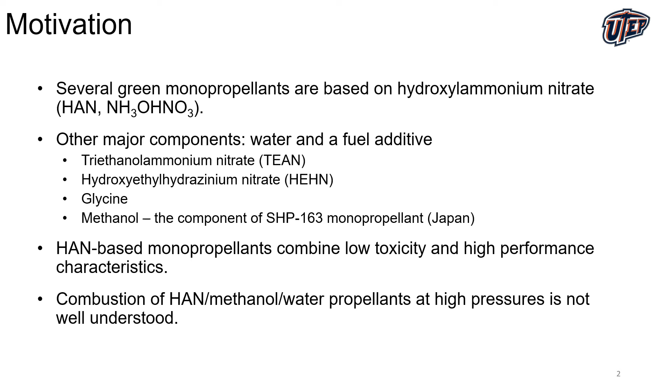It's also interesting to note that the formulation that had less water only had 2 pressure regimes, both with a positive pressure exponent. However, the burning rates were lower over the tested pressure range, suggesting that water may play a role in the combustion of these propellants.

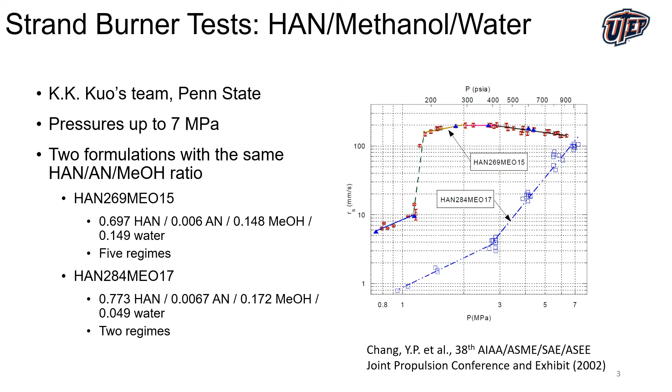Some additional tests were conducted by Petersen's team at Texas A&M. They tested at pressures up to 22 megapascals using both 82.4 weight percent aqueous HAN solution and a solution of 70.1 weight percent HAN, 14.9 weight percent methanol, and 15 weight percent water.

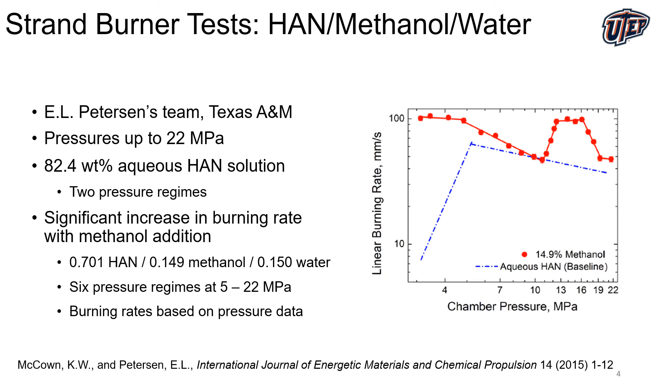For the 82 weight percent aqueous solution, shown in the blue line here, they found 2 pressure regimes, including a rapid increase in the burning rate at low pressures, followed by a negative pressure exponent beyond about 5 megapascals. With the addition of the methanol, they found a great increase in the burning rate at lower pressures, followed by 6 distinct pressure regimes as the pressure increased up to the maximum tested of 22 megapascals.

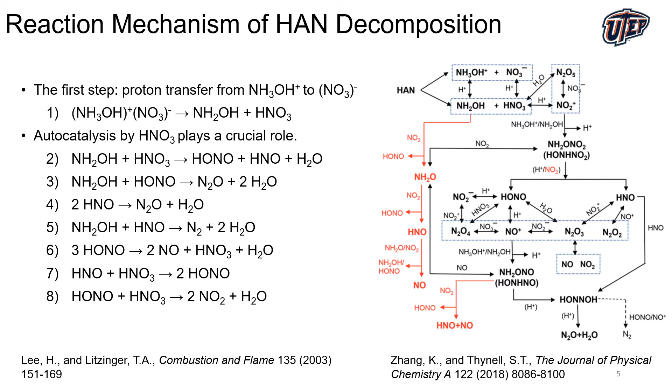Briefly discussing the reaction mechanism of HAN decomposition. On the right, we can see a more complicated analysis of the decomposition mechanisms. However, we focus on the left for a second. The generally agreed upon overall reaction mechanism starts with a proton transfer, creating hydroxylamine and nitric acid, and then from there the nitric acid plays an autocatalysis role throughout most of the rest of the decomposition. This indicates that the nitric acid plays a significant role in the decomposition process, which we'll get more into later.

Combined with simultaneous mass spectrometry, during these tests we identified the major gas products as water, nitrogen gas, nitric oxide, nitrogen dioxide, nitrous oxide, and nitric acid.

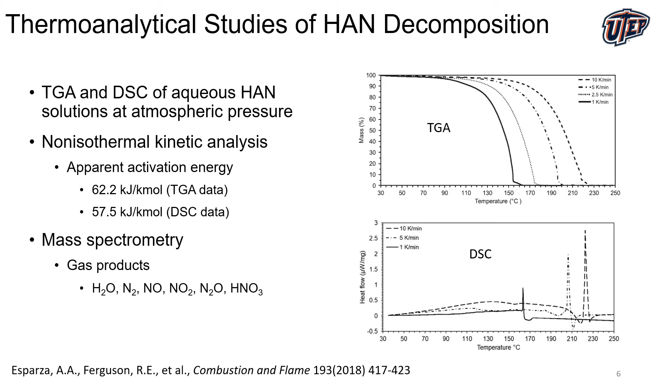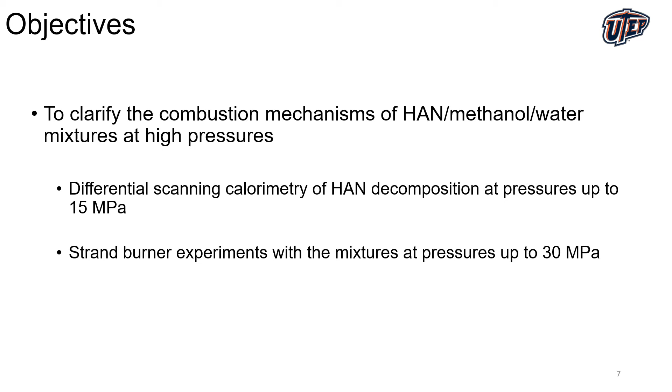So the objectives of the current study are to clarify the combustion mechanisms of HAN methanol water mixtures at high pressures, and we intend to do this by using differential scanning calorimetry of aqueous HAN solutions at pressures up to 15 megapascals, combined with strand burner experiments with the mixtures including methanol at pressures up to 30 megapascals.

For the propellant blends we used, we ordered aqueous HAN solution as a 24 weight % solution from Sigma Aldrich. For the HPDSC testing, it was used as received. And for the HAN methanol propellants, the concentration of HAN was increased up to 82.4 weight % by water evaporation in a vacuum desiccator. The anhydrous methanol was from Millipore, and that was also used as received in the propellant blends. The final propellant mixture is the same as that used in the McCown-Petersen investigation, which is 70.1 weight % HAN, 15 weight % water, and 14.9 weight % methanol.

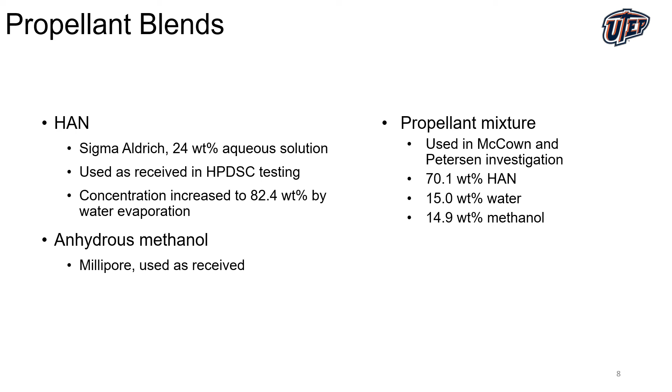Our high pressure DSC is a Netzsch DSC 204 HP Phoenix. Again, we use the 24 weight % aqueous HAN solution from Sigma Aldrich as received. In this case, a 10 microliter sample was placed into a 6 mm aluminum crucible. We used 3 vacuum cycles and then purged with nitrogen.

One to purge the residual air from the furnace, and two to evaporate most, if not all, of the water from the HAN solution. For the test we'll be discussing here today, we used a constant heating rate of 10 Kelvin per minute, and testing was conducted up to 15 megapascals, which is the maximum pressure allowable with the instrument.

This is our strand burner. In the middle you can see the test cell. The gas rack is to the right, and on the left you see the control console where the operations are conducted. It was designed and installed by Design Integrated Technologies. It can operate at pressures up to about 5,000 psi or 34 megapascals. It uses a nitrogen environment, and a temperature bath controls the initial temperature to approximately 25 degrees Celsius.

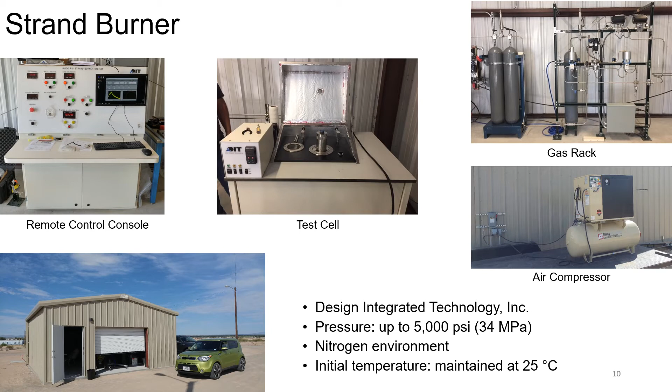Because the strand burner was originally intended for use with solid propellant strands, we used a quartz tube attached to the test head to hold the liquid samples. The tube is 7 millimeters inner diameter and 9 millimeters outer diameter. 3 sets of holes were drilled through the tube, the first being for the nichrome ignition wire, and the second 2, placed 3.5 inches apart, are used for the 2 break wires.

As these break in sequence as the combustion front travels, the breaking of the wires automatically starts and stops the timer on the control console, so we can determine the burning rate based on the time and the known distance between the 2 wires.

And what we think is happening is that below about 2 megapascals or so, the nitric acid that's produced from that initial proton transfer is evaporating, so it doesn't play that much of a role in the further decomposition until it builds up enough. Once we get past about 2 megapascals, the boiling point of nitric acid becomes higher than the decomposition temperature. Therefore, the nitric acid stays around longer, and the decomposition temperature becomes more constant after that.

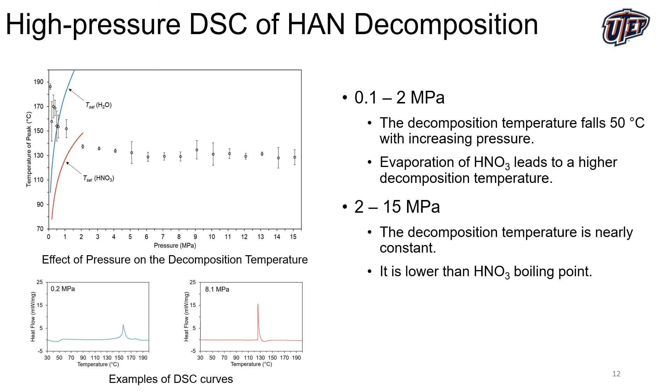We tested from 8 megapascals up to 30 megapascals. At 8 megapascals, there did appear to be propagation of the combustion front, but it was apparently not hot enough to burn through to break the fuse wires. We checked some DSC testing on the fuse wire material and found that they break at around 318 degrees Celsius. So this indicates that the combustion temperature at 8 megapascals was likely lower than that.

Above 9 megapascals, we consistently had the fuse wires breaking and were able to produce consistent data. I would like to point out our data is distinctly higher than that from the McCown-Petersen results. We believe this is associated with the direct data from the breaking of the fuse wires and the timer, whereas in the McCown-Petersen results, they used pressure-based data which included gas phase reactions, leading to a longer burn time and thus producing apparent slower burning rates.

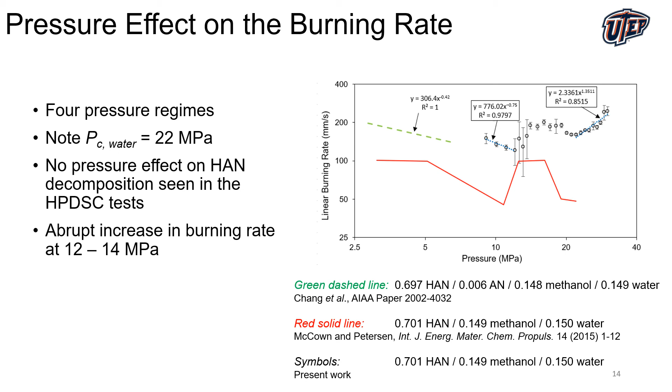So right there, we believe we're seeing a transition to a faster combustion regime. And if we specifically look at the actual test results, we see that some of the test results seem to line up with the lower pressure negative pressure exponent, whereas other tests seem to fall more in line with the plateau that we see at higher pressures. This seems to indicate that there's a transition region going on right here.

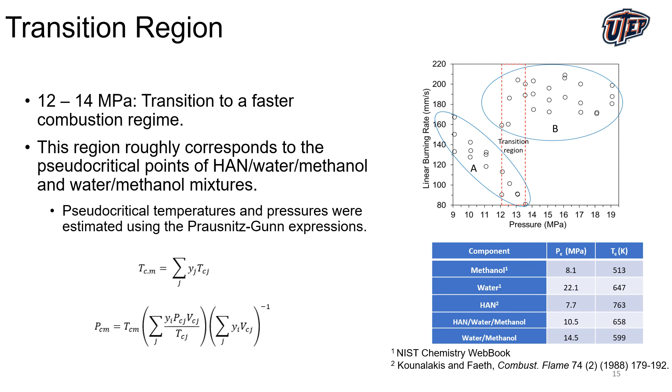So what we propose is happening is that below this mixture pseudocritical point, the HAN is decomposing and producing bubbles in a liquid. Because of the liquid's boiling point, the temperature of this combustion front at the liquid gas interface is restricted and unable to exceed that boiling point. This is essentially putting the brakes on the burning rate or the reaction rate. In addition, as the pressure increased, it has been reported before that the meniscus becomes shallower, thus decreasing the surface area at the liquid gas interface and therefore reducing the amount of decomposition from there.

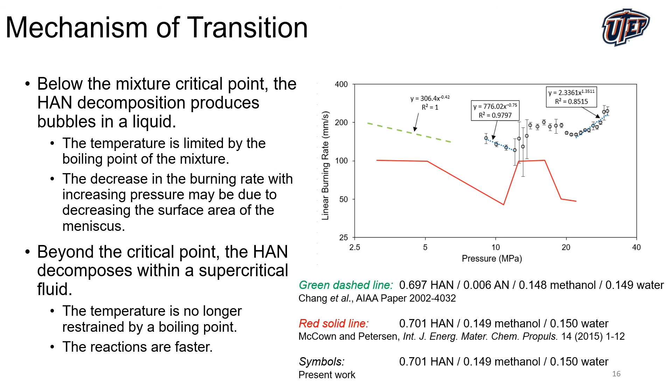Once we get past the pseudocritical point, the HAN is decomposing within a supercritical fluid. At this point, there's no longer a boiling point which is restraining the temperature, and the reactions are able to proceed much faster.

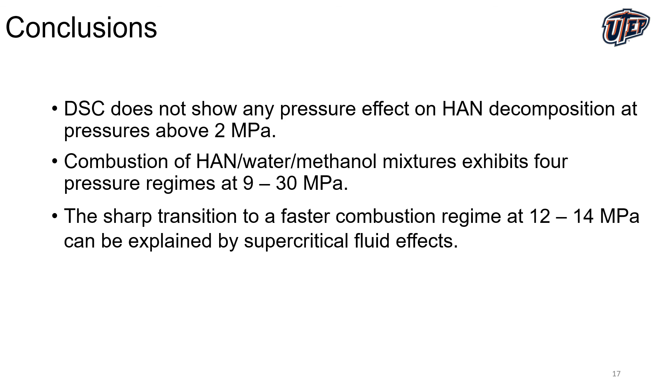In conclusion, the DSC did not show any pressure effect on the HAN decomposition at pressures above 2 megapascals. We found that the combustion of HAN water and methanol mixtures exhibits 4 distinct pressure regimes in the tested range of 9 to 30 megapascals, and the sharp transition to a faster combustion regime in that noisy region at 12 to 14 megapascals can be explained by supercritical fluid effects.